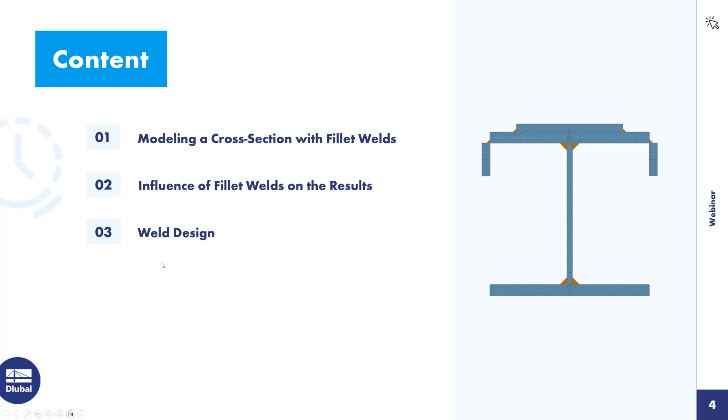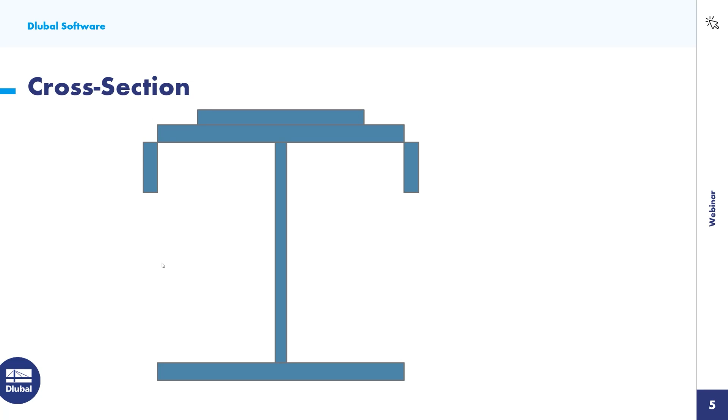The presented I section, featuring a welded reinforcement and welded lips on the top flange, will be modeled in RSECTION. During this process, the types of fillet welds available in the program will be introduced. The throat welds are modeled using a standard fillet weld. The connection between the reinforcement plate and the flange is created using a lap fillet weld, while the lips are attached to the flanges via corner fillet welds.

To begin, I create a new file in RSECTION. I name this file example1. Since weld stresses can only be calculated using the analysis method thin wall analysis, I select this option. For the material, I choose steel S235. This material is already inserted in this file, but if you would need another material, you can choose it from the material library.

I insert the I section to be modeled from the cross-section library. I use the section type parametric thin walls, since this section type allows me to define the parameters of the cross-section manually. For the welded cross-section, I also choose the manufacturing type welded. I then define the dimensions of the cross-section: the height is 300 millimeter, width is 300 millimeter, the thickness of the web is 10 millimeter, and the thickness of the flanges is 20 millimeter.

At this point, welds could already be defined, but I deliberately postpone this step in order to demonstrate later how to create welds and what settings must be considered. When inserting the cross-section, I disassemble it into its individual components to allow for further editing.

To ensure that the force transfer occurs exclusively via the weld and not through adjacent elements, a separation joint must be defined on the welded element. Let me explain this in more detail.

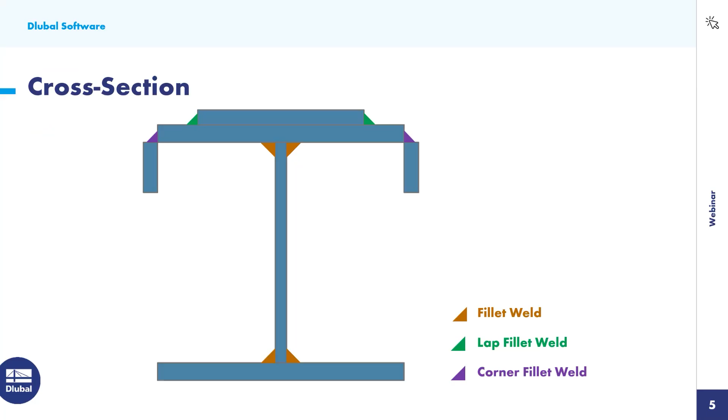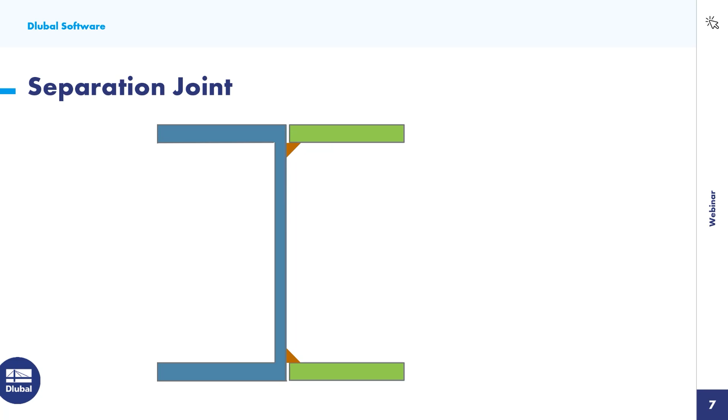In this example, the web is welded to both the top and bottom flanges. In this case, the web is considered the welded element. Therefore, separation joints must be applied at both the beginning and end of the web, in other words at its connections to the flanges. If, on the other hand, the two right-hand flanges were to be welded to an existing U-section, the separation joints would need to be defined on the flanges, as they would then be the welded parts. The separation joint is defined directly within the corresponding element.

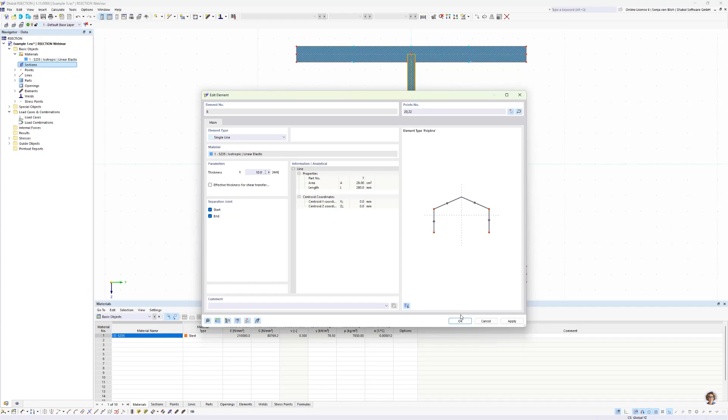In this case, I open the Edit dialog of the web, and here I define the separation joint on start and end of the element. For verification, the separation joint is also shown graphically in the model.

Next, I define the fillet welds. For this, I use the weld type fillet weld. First, I define the throat thickness. This should be 10 millimeter. Then I select the elements to be connected by the welds. These are the upper flanges to the web and the lower flanges to the web.

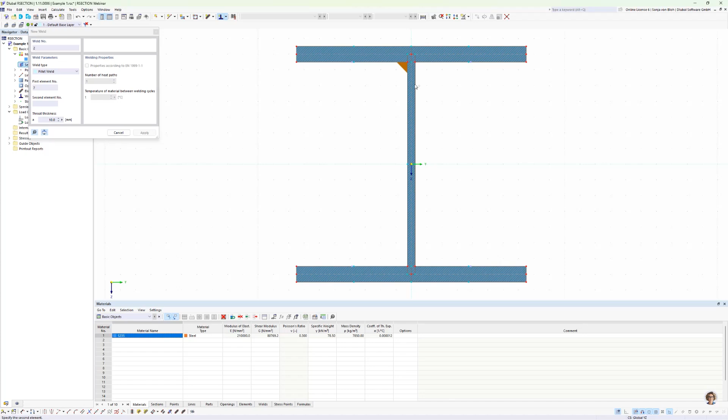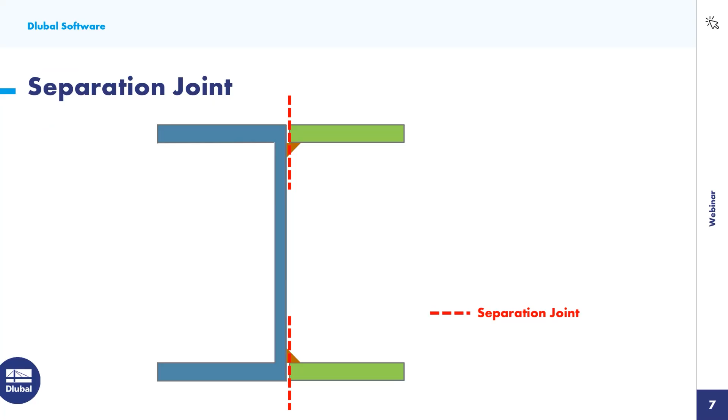The connection between the flange and the web is made via the fillet welds. I would now like to show in detail how these welds are represented. To do this, I examine the connection between the web and the top flange. The previously defined separation joint on the web ensures that there is no direct connection between the web and flange. Force transmission takes place exclusively through the weld.

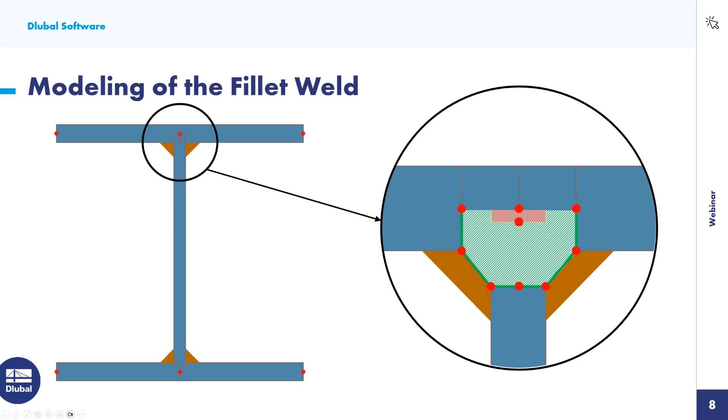For comparison, I create an additional file with identical cross-section but without welds. I name this file example2. I choose here once again the analysis method, thin wall analysis. I use the material S235 and I define the I section with the help of the cross-section library.

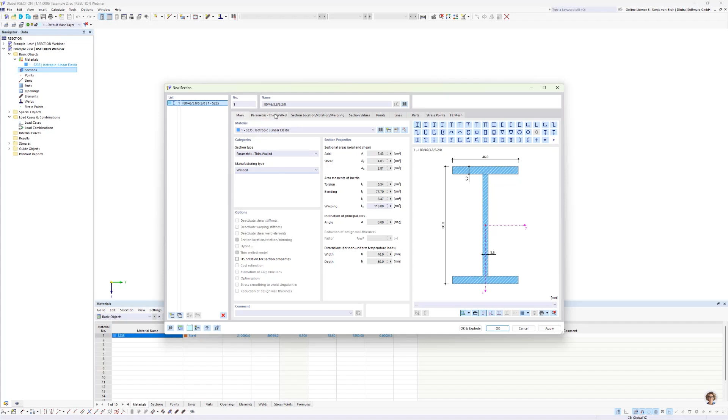Here I choose the section type parametric thin-walled, the manufacturing type welded, and I define the dimensions of the cross-section: height 300 millimeter, width 300 millimeter, thickness of the web 10 millimeter, thickness of the flanges 20 millimeter. I insert the cross-section with OK and explode.

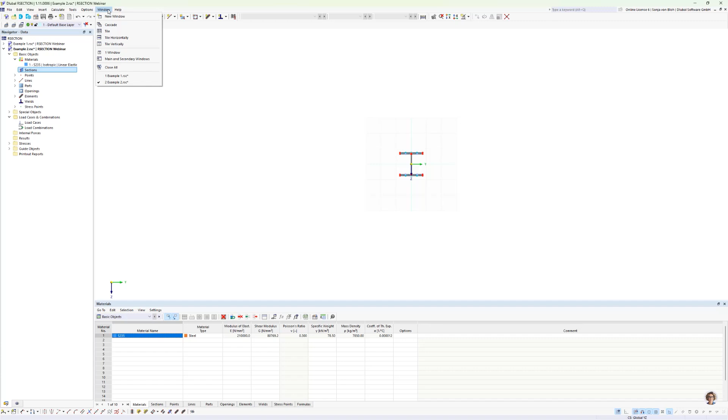To directly compare the cross-section properties and stresses, I display both models side by side, and for this I use here this function, tile vertically. Then I start the calculation in both files.

As already explained, the torsional constant in the file with weld is higher because of the additionally considered Bredt torsional moment of inertia. Here I have a torsional constant of 195, and in the file without welds I have a torsional constant of 142. I then compare the unit shear stresses due to torsion.

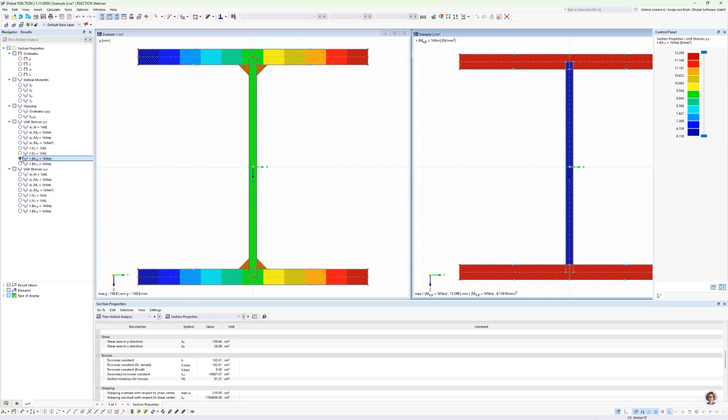For this, I activate here the unit shear stresses in both files, and I choose here the type of display off, and also in this file. In the region of the closed cell, due to the welds, higher torsional shear stresses are observed in the welded section, while lower stresses occur in the remaining areas of the cross-section.

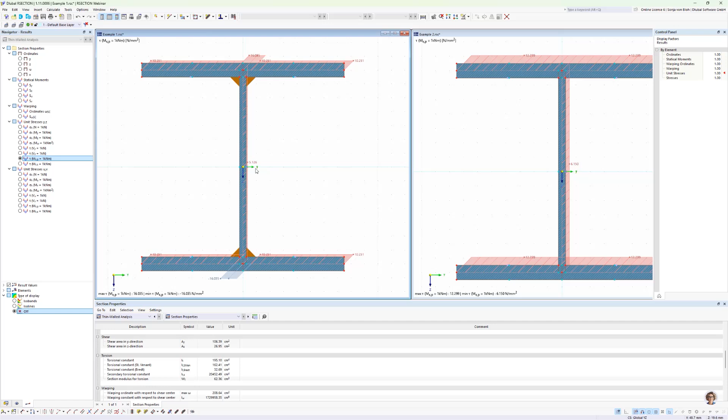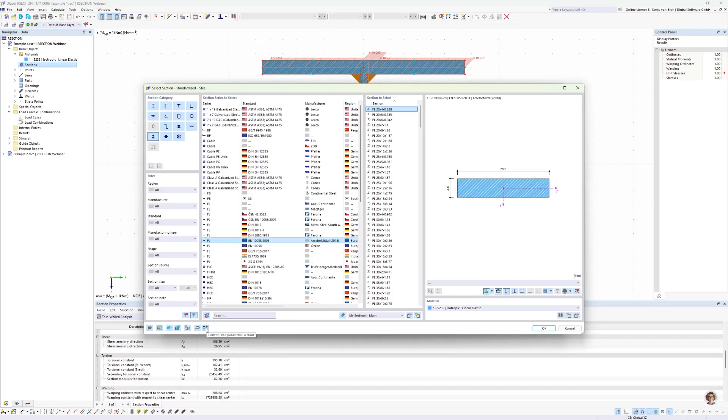To further reinforce the I section, a flat steel bar is welded to the top side of the flange. I select a flat steel profile from the section library. For this, I open the navigator data and insert a new section, a flat bar. I want to define the dimensions manually, and I want to define here a width of 200 millimeter and a height of 50 millimeter.

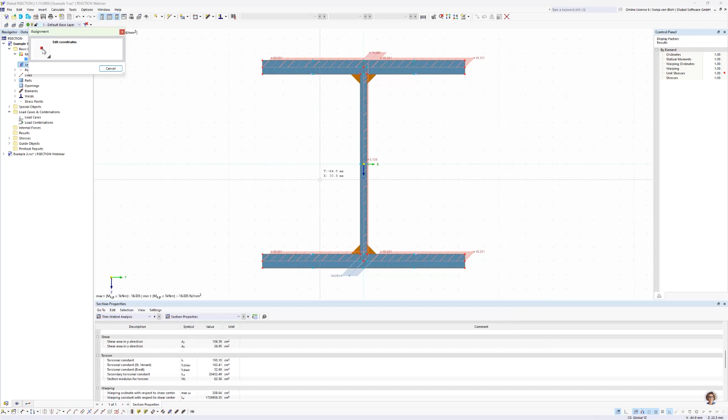In the graphic preview, I set the center of the bottom edge of the flat steel as the reference point. I then select the insertion point in the working window, which corresponds to the center of the top flange. After confirming with OK and explode, the flat steel bar is placed centrally on the top of the flange.

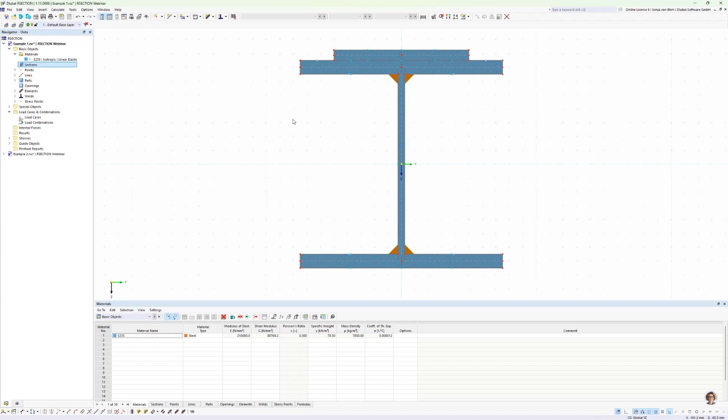The connection between the flange and the reinforcement is made via a lap fillet weld. This type of weld provides a direct connection between both components, making additional connection elements unnecessary. Lap fillet welds are suitable for elements that run parallel to each other and make contact at at least one point. So I open the lap fillet weld dialog, and here I define first the throat thickness of 5 millimeter.

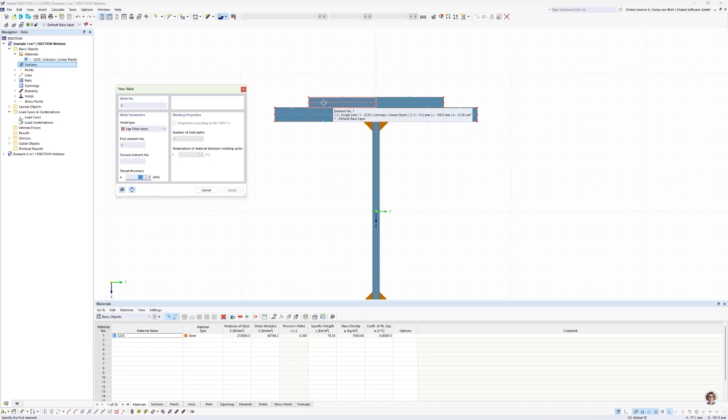The first element to be selected is always the one whose front face the weld will be applied to. And this is here, this element on the top. As soon as the mouse hovers over the second element, a preview of the weld appears in the working window. Clicking on the second element completes the creation of the welds.

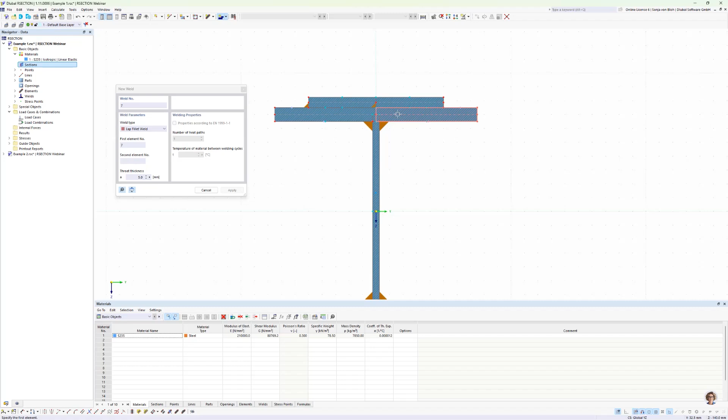On the right-hand side, I do the same, but I see here that the weld is not placed as intended. This is due to the graphical input method, where the first weld is automatically placed at the start. Only a second fillet weld on the same element would be generated at the element's end.

To correct the weld's position, the orientation of the first element can be reversed. I will do this here in this file. I select here reverse element orientation, and now the weld is in the correct location.

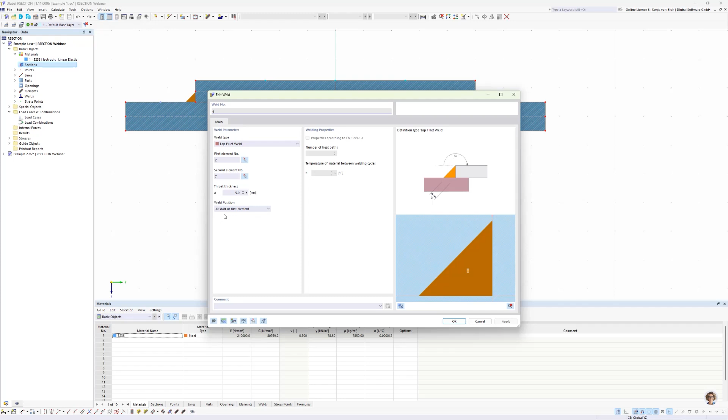You have an alternative way to do this. For this, I undo this action. You also have the possibility to define the position in the weld dialog, and here you can choose the weld position at end of first element.

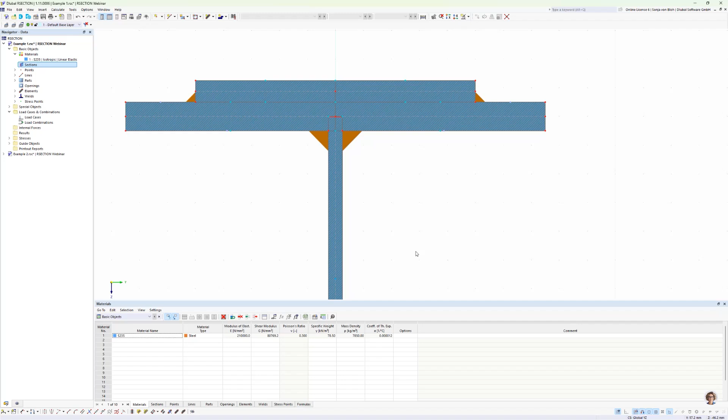To further reinforce the top flange, additional lips are welded to the sides. For this, I select a flat steel profile from the section library. So I open the section library again. I choose here bar sections, convert into parametric section, and then I define here the width.

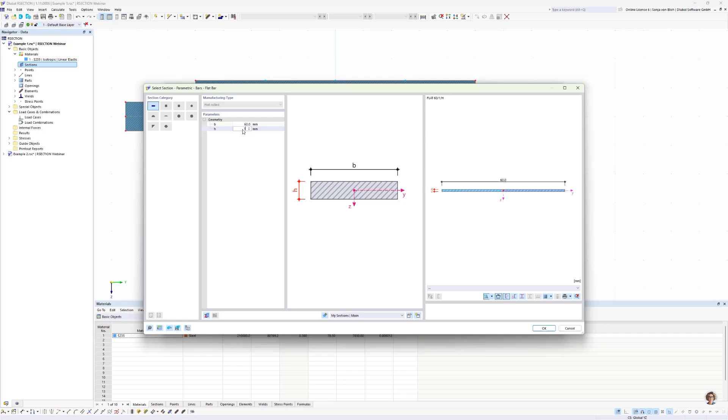And the width should be 60 millimeter and the height 15 millimeter. I have now to rotate this cross section, and I do this in the step section location rotation mirroring, and I define here the rotation about x-axis, about 90 degrees.

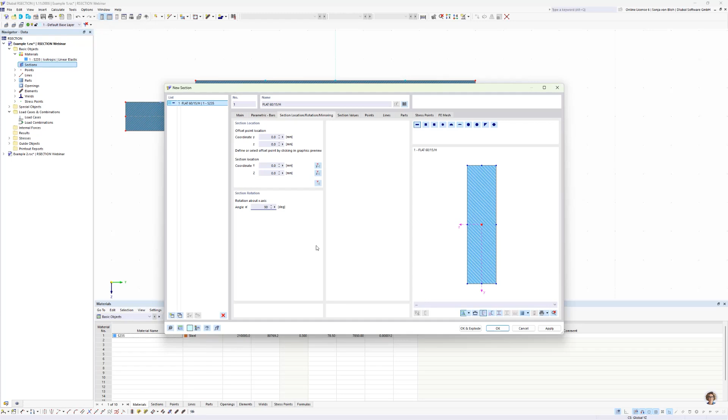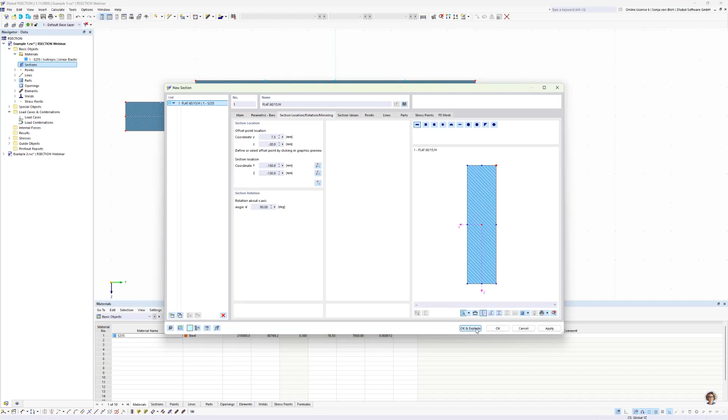In the graphic preview, I set the upper right corner of the profile as the reference point. So I click here on this point with the mouse. The insertion point is then selected as the lower left corner of the top flange in the working window. And the cross section will be inserted with OK and explode.

The inserted lip is then copied to the right-hand side. To do this, I select the component, and then I choose the Move Copy command. In the dialog that opens, I activate the checkbox Create Copy, and then I define the displacement vector.

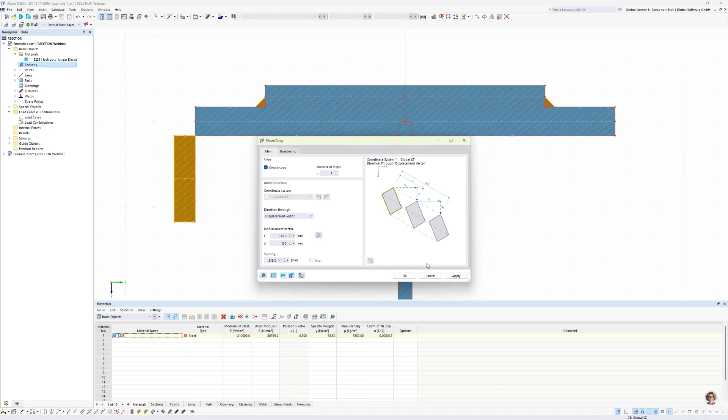And click on OK. The connection of these parts is made directly using a corner fillet weld, meaning no additional connection elements are required. The only requirement is that the elements must touch at least one point. So I open here the corner fillet weld dialog. I define a throat thickness of 5 millimeter, and then I select the elements to be connected.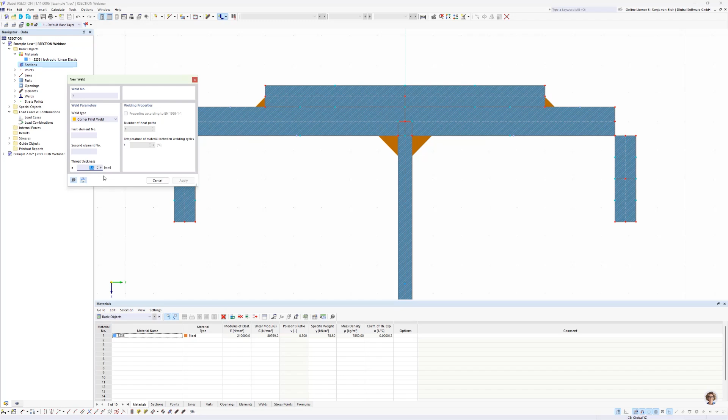The elements are selected one after the other using the mouse. The order of the selection does not matter. So I select here these elements. The welded cross-section is now fully modeled.

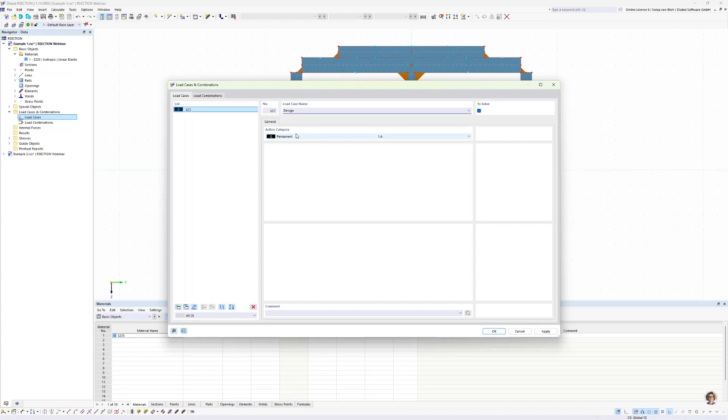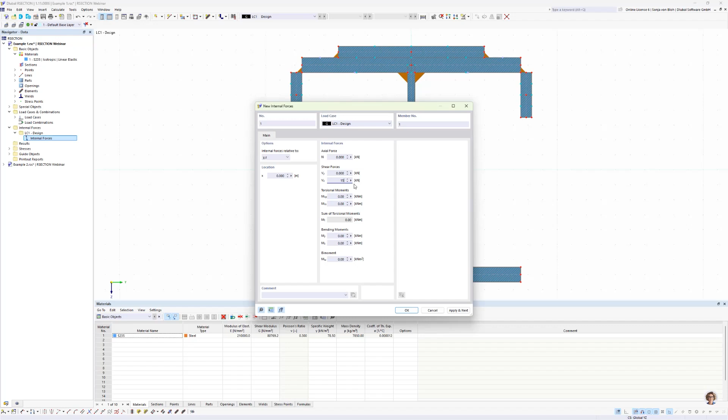The next step is to perform the weld stress checks. For this, a new load case must be defined. So, in the navigator data, I create a new load case and I define the load case name design. Within this load case, I define the relevant internal forces. So I open here in this load case the internal forces dialog, and I specify a shear force of 150 kilonewton.

The selection of the weld stress components to be calculated is done in the weld stress configuration dialog. You find this dialog via the navigator data, here under stresses, stress configuration, weld stress configuration. Here you can choose the stresses to calculate, and here it's also possible to define the limit stress types. The limit shear stress is calculated automatically, but it's also possible to define the limit shear stress user-defined.

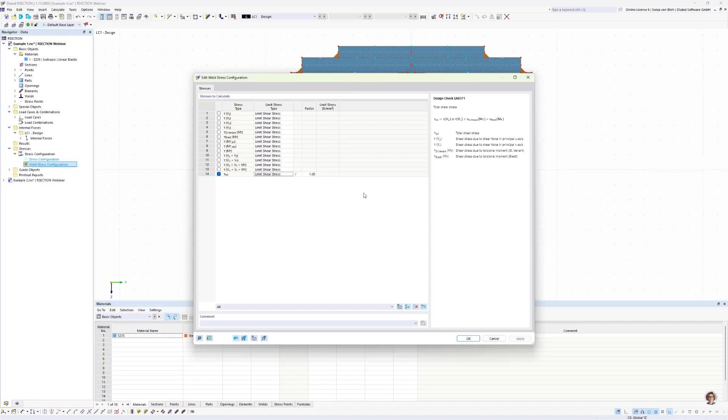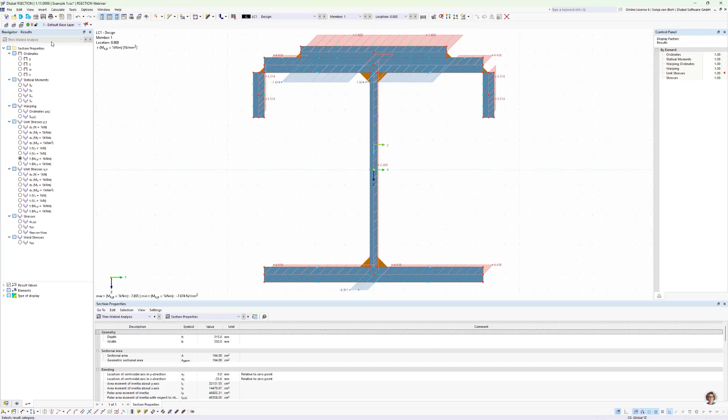I leave the default settings unchanged, so I click here on OK. I then start the calculation. The weld stress results are displayed both graphically and in tabular form. The graphical results are located in the navigator results under weld stresses, and here I have to use the type of display isobands, and then you see here in the stresses directly the weld stress values.

The tabular results can be found as a subtable under analysis of thin walled structures. So it's here this subtable weld stresses. This table includes the calculated stresses, the allowable limit stresses, and the resulting stress ratio. With that, all steps for modeling the welded cross-section and performing the weld stress design in RSECTION are complete.